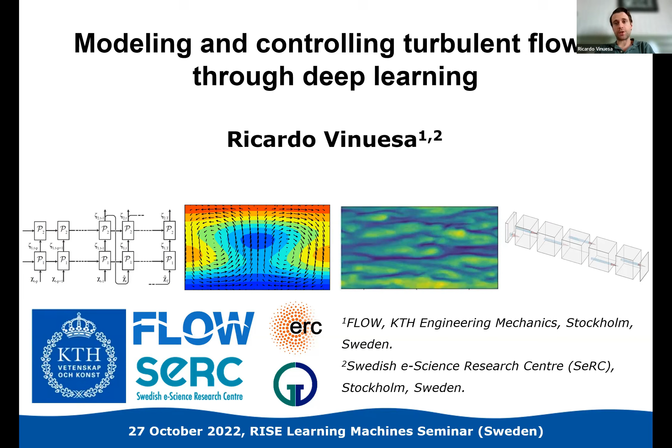Thank you very much for the kind introduction. Can you see my slides? Yes, it looks good. Perfect. And thanks again for inviting me to present in this seminar. I'm going to tell you about my work on modeling and controlling turbulent flows through deep learning. I am at the Department of Engineering Mechanics at KTH in Stockholm.

So I'd like to start. Can you see the next slide now? Yes, perfect. So I'd like to start with this introductory slide from Airbus, where we can look at a typical airliner and assess the various contributions to the total drag. Around 50% of the drag in an airplane comes from friction, which means that looking at turbulent boundary layers is a good approach to understand the total drag. Around 40% of the total comes from lift-induced drag. So that happens in finite wings, basically because of the pressure difference between the pressure and suction sides. One can actually see these wing tip vortices that have an important effect on the total drag.

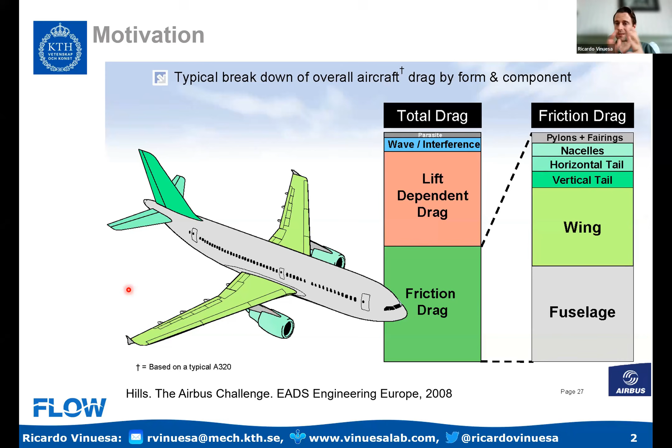So looking at turbulent wings, and in particular looking here with the laser pointer, which you can see now—so in particular, looking at wings that are finite, we can understand around 90% of the total drag in a turbulent wing, essentially.

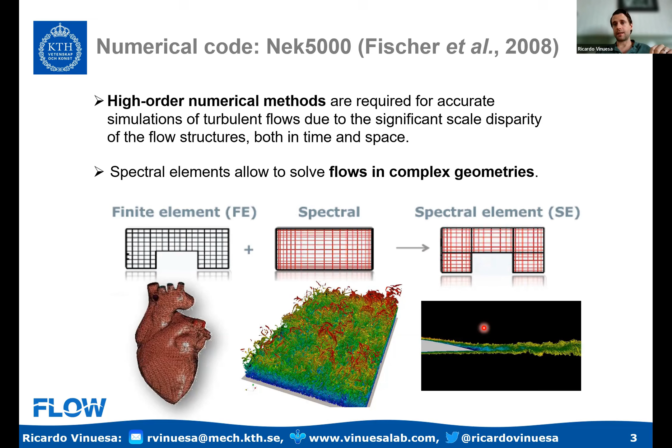Now, the way in which we use this analysis is through numerical simulations. We use the spectral element code Nek5000, developed by Fischer and others. This code combines the geometrical flexibility of finite elements and the high-order convergence of spectral methods, allowing us to simulate with very high accuracy geometries of quite some complexity. That's what you can see here at the bottom right, where I'm showing a simulation we performed some years ago. This is a turbulent wing at Reynolds number of 400,000, simulated with DNS, so all the scales are properly simulated. Now, we can generate massive amounts of data, very complete databases that help us produce better data-driven models using machine learning.

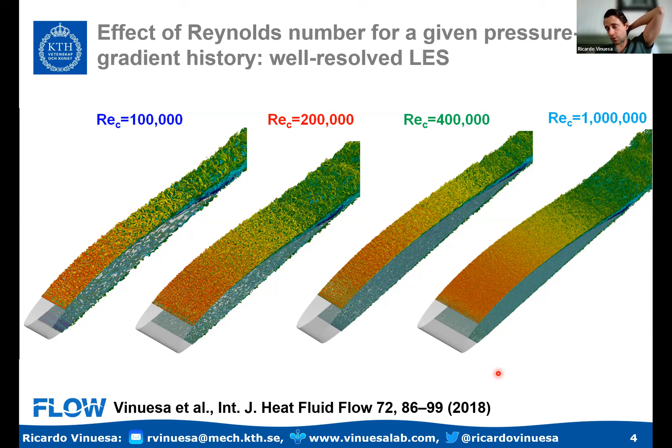So what you see here is a range of simulations in turbulent wings. This is a NACA 4412 wing section, where the first Reynolds number is 100,000, but we go all the way up to 1 million. This database can be found in this reference, Vinuesa and others, an article in the International Journal of Heat and Fluid Flow, where we share all the data on these very detailed flow simulations.

In this case, the Reynolds number is at 1 million. This is a quite high Reynolds number where the aerodynamic properties of the wing section are already relevant to those of the full-scale application. And you can actually say that even if it's a very large simulation, over 2 billion grid points on the computational mesh, we can see that we already have some limitations in terms of the geometry.

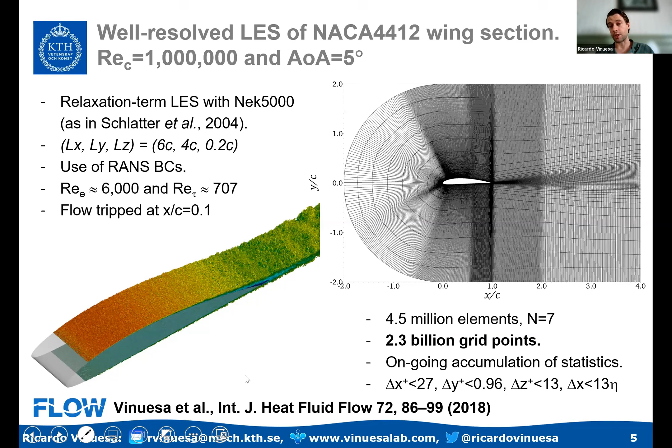So these very elongated elements lead to very high aspect ratios, which in principle preclude us from really computing very, very high Reynolds number configurations. Something that can be done is to go in the direction of adaptive meshing.

So being able to have a mesh where automatically we find refinement in the regions where we need more resolution, and due to the non-conformal meshing, we can actually have quite coarse elements close to the far field.

And this case that you see here is a finite wing with a rounded wingtip, where we can actually see the wingtip vortex rolling from the pressure to the suction side, and really this vortex is actually being tracked by the resolution that we have in the mesh.

And this very complex situation will really help us to obtain very good data and a very good representation towards understanding the contributions of the total drag in a wing.

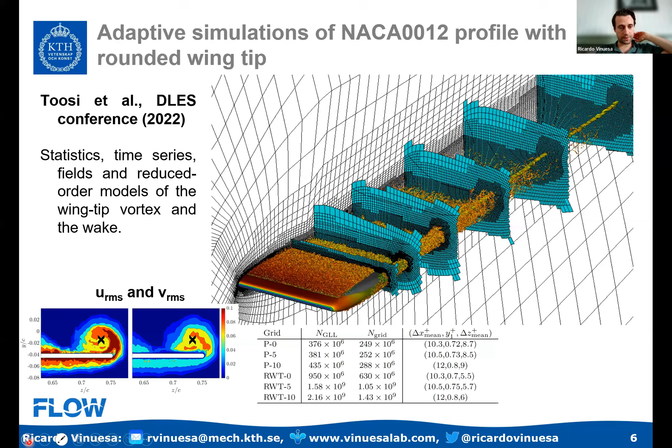So armed with all this variety of databases, I'm going to show you this video, we can actually see how it's possible to, let's make sure that it works, how it's actually possible.

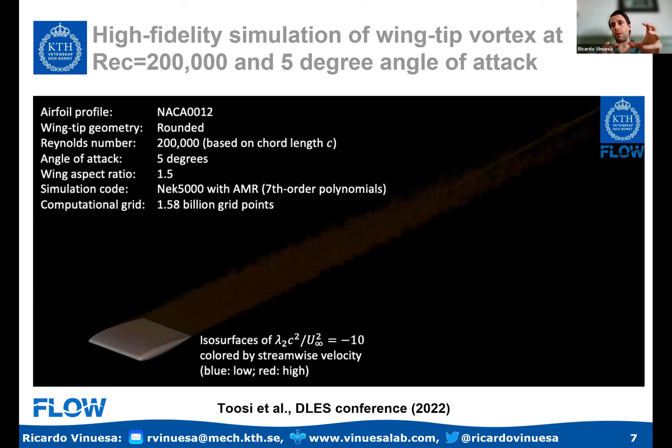So you can actually see the level of detail that we obtain in our simulations. This is a wing that is finite with a rounded wingtip. This is a simulation of 1.5 billion grid points using adaptive meshing, and I'm showing you vortical structures.

So these are basically coherent vortices which contain very high vorticity. And these are very characteristic of turbulent flows.

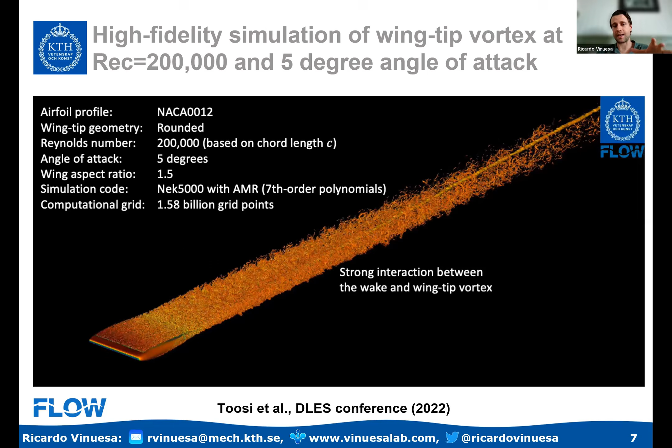Now, what I'm showing you in this visualization is the possibility of actually understanding how the wingtip vortex is rolling up from the pressure to the suction side, and the effect of this vortex on the aerodynamics of the wing.

And so what this vortex is doing is that it's basically pushing down the wake because of the rotation, and that action is producing less capacity of the wing to extract lift from the flow, and therefore it has an additional component which is the lift-induced drag.

And this is the 40% that I was mentioning at the beginning.

So basically, being able to use these very detailed flow simulations, one can actually try to understand a lot about the aerodynamics in these complex flow cases, and hopefully not only improve our understanding, but also improve our aerodynamic design.

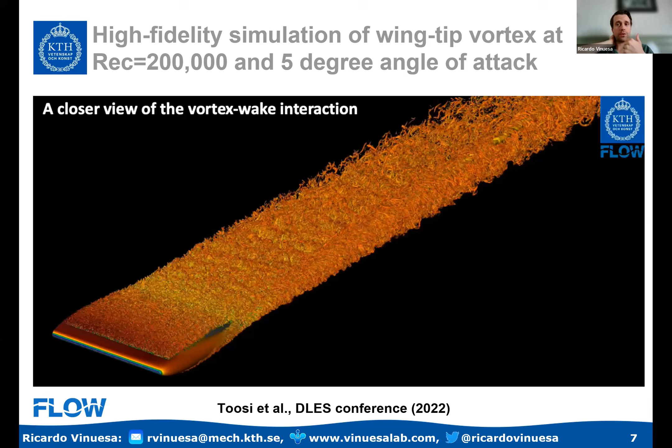This now here you can really see in a lot of detail how the wingtip vortex is rolling up from the pressure to the suction side.

You can see these vortical structures on both the suction and the pressure side boundary layers, and you can see how there is a partial relaminarization of the flow due to the span-wise pressure gradient of the wingtip vortex induced on these turbulent wings.

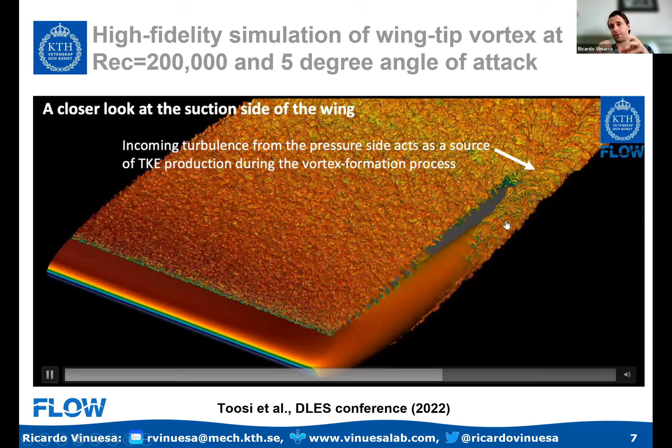And here we can see from the other angle how the wake looks like with partial relaminarization, and how the turbulence around the wingtip vortex is actually leaving quite some rotation around there.

So in particular, you can see how these very, very detailed flow simulations can be used to produce highly accurate data. And this data, we're going to be able to exploit it to develop machine learning applications.

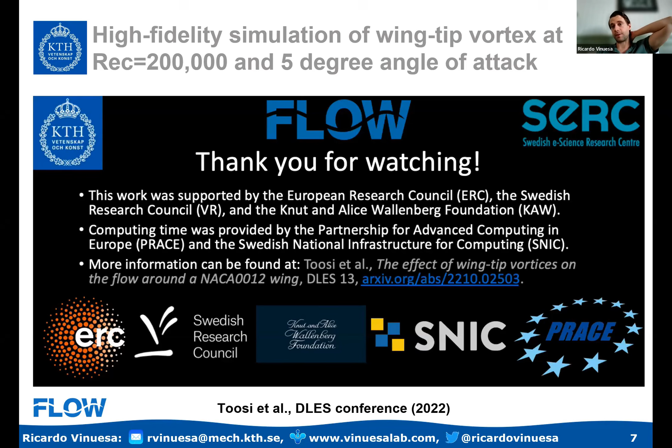This is, by the way, work by Siavash Toosi, a senior researcher in my group. He's presenting it at the DLES conference happening these days. And actually, you can see quite some possibilities of data-driven approaches with these databases.

So if we focus now more on the concrete applications of machine learning, traditionally, there has been a wide variety of machine learning applications to fluid mechanics, starting 20 years ago with the work by Petros Koumoutsakos, where he used neural networks to model the near-wall region of a channel.

More recently, there has been quite some work on subgrid scale modeling, definition of inflow and boundary conditions, flow control, RANS modeling, and even physics-informed neural networks to try to improve some of the sensing and experimental measurement in a number of configurations.

So there's quite some potential with machine learning and fluid mechanics. And in this presentation, I'm going to give you several examples of these possible areas of influence.

So we highlight that machine learning can help to accelerate direct numerical simulations. Machine learning can also help with improved modeling of RANS and LES.

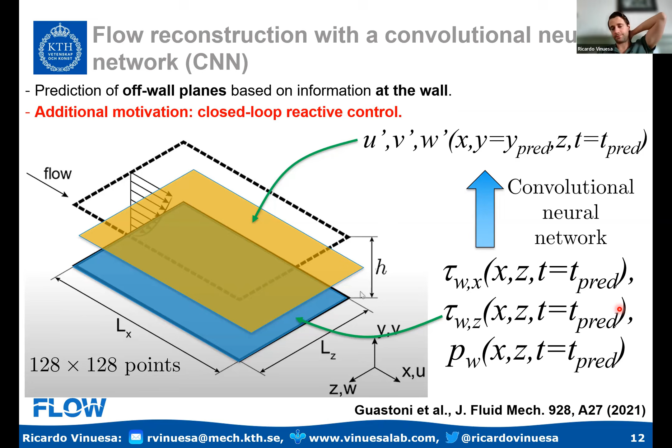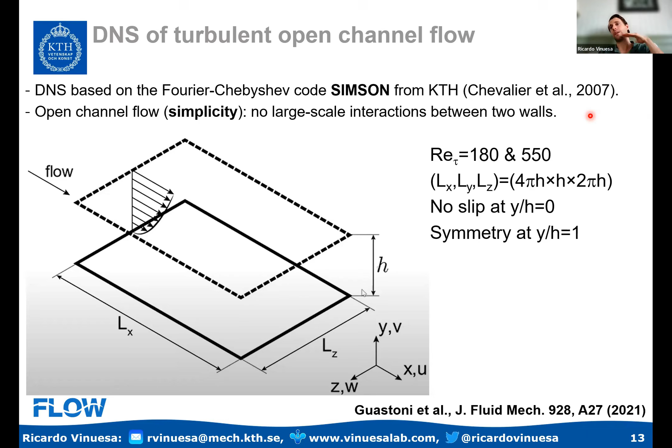So what we do is produce 2 databases. Both are direct numerical simulations, one at a friction Reynolds number of 180, another at a friction Reynolds number of 550, which starts to be already turbulent with quite some scale separation. And we're going to train neural networks to connect the wall information with the fluctuations above the wall.

Of course, this can be done in different ways. One could use fully connected neural networks, but the problem is that they don't allow us to exploit the spatial information in the data. That's why convolutional neural networks are much more convenient, because turbulent flows have a quite pronounced spatial behavior, so we can try to exploit the coherent structures in the flow through convolutional neural networks.

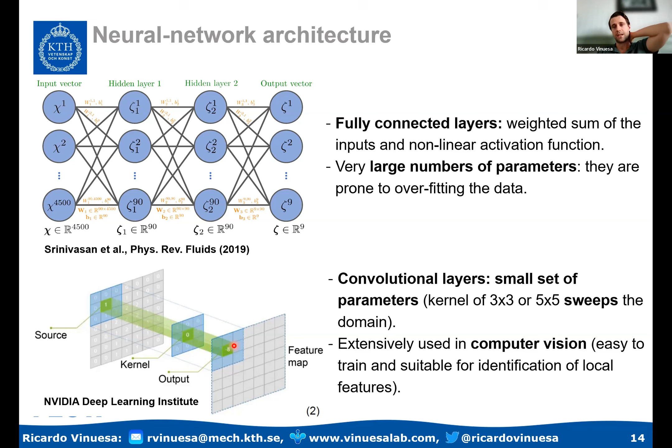In a convolutional neural network, I have this input map, basically my image. This little window is a kernel, which allows me to swipe through the input, and applying convolution operations, I can see how the data in the input is distributed in space to exploit those spatial correlations in the data. So CNNs are very widely used in computer vision for this reason.

Now here you can see one of our architectures. This is a CNN with 6 hidden layers, and you can see the number of filters that we have per layer. We have 3 inputs, which are the 2 wall shear stresses and the wall pressure, and 3 outputs, which are the 3 velocity fluctuations.

As you can see, a CNN is basically going to, in the first layers, identify less abstract and smaller features in the data, like edges or regions of recirculation. Through the concatenated application of convolutions, I am progressively building towards elements which are more abstract, so more complex, and larger. So I can hierarchically build the coherent structures in turbulence that you saw at the beginning of the video, through simpler elements identified in the first layers.

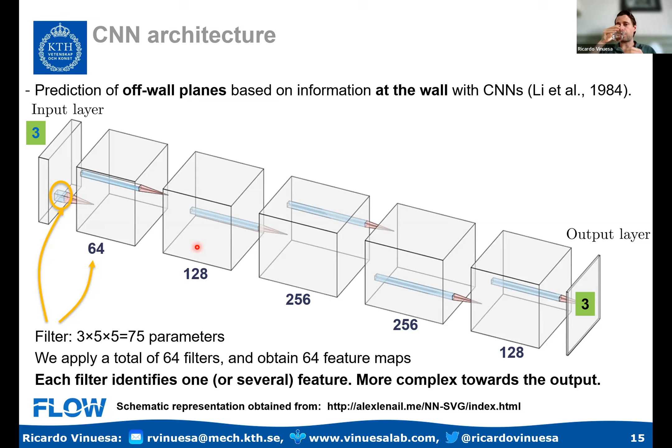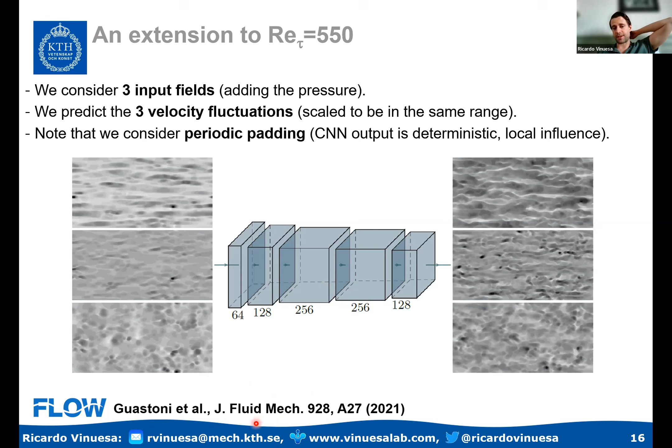So now what we have is on the left, the inputs, the wall shear stress components and the wall pressure. On the right, the outputs, which are the streamwise, wall normal, and spanwise fluctuations at a particular wall normal location. The results are at a friction Reynolds number of 550, and again, all the summary of this data can be found in JFM, in the reference you can see here at the bottom.

Now, what I showed you so far were predictions based on the full plane as an input and then the full plane as an output. So this is what we call the FCN, the fully convolutional network.

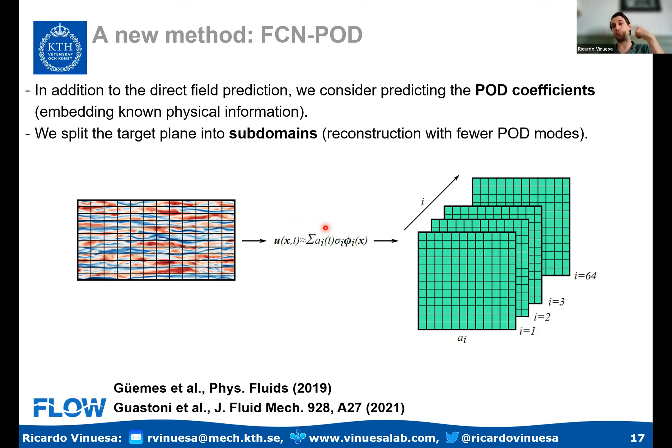But there's another method which we call FCN-POD, which combines the fully convolutional network with POD, that's proper orthogonal decomposition. This method is also known as PCA, principal component analysis, in many other areas. Essentially, this method allows us to decompose the spatio-temporal problem into spatial modes and temporal coefficients in such a way that the neural network only needs to predict the temporal coefficients. So that, in some cases, can actually be beneficial.

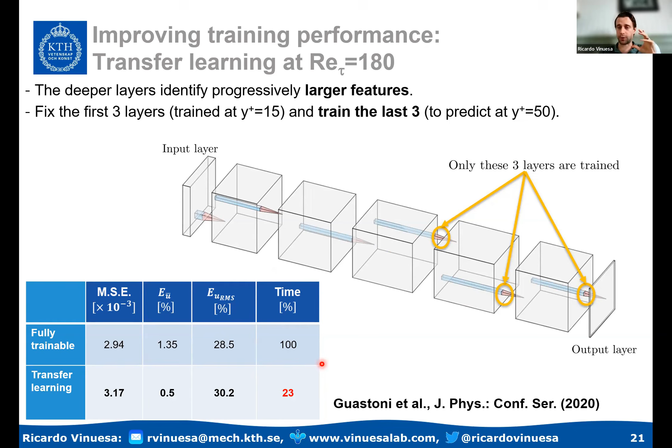So in that case, what we do is that we freeze the three first layers, because the three first layers are targeting features that are more similar and smaller, close and far away from the wall. But the three last layers, which are going to be focusing on larger features, those ones are retrained. So I only transfer the three first ones, and the three last ones are retrained. What we get is the same level of accuracy, but we reduce the training time to 23% of the original, so we reduce the training time by a factor of more than 4. Transfer learning is actually quite effective in the context of turbulent flows.

This also happens when I take a network to predict at Reynolds number 180, and I take those weights to start the training at Reynolds number 550.

So in the high Reynolds number case, I compare transferring the weights versus starting from random initialization of the network weights. What I find is that I can reduce the amount of training data by a factor of 4. That's interesting because the higher Reynolds number data is much more expensive computationally. Being able to focus most of the training on the low Reynolds number case and reducing the use of expensive data by a factor of 4 is extremely valuable. That's a quite helpful technique with transfer learning that can have many applications in turbulent flow and other engineering applications.

Ricardo? Yeah, could you please repeat the transfer? Where is it transferred from and to? This example or the previous one?

In this example, we have one network to predict at friction Reynolds number 180, that's the low Reynolds number, with all the weights. Then we take another network to predict at a higher Reynolds number, and we transfer the weights. So in the high Reynolds number case, I start the training from the weights that were transferred from the low Reynolds number case.

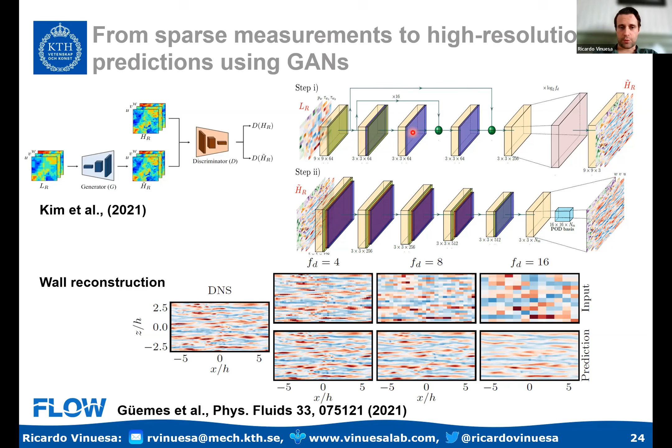Now, if we go to the next example - I showed you predictions from the wall to above the wall, but there is another possibility of predicting from far away from the wall to closer to the wall. That has the motivation of developing wall models, basically trying to replace a big part of the expensive simulation by just having a boundary condition over there. This is work published in arXiv, you can see the details over here. What we're going to do is use a convolutional neural network to predict the flow close to the wall based on flow far away from the wall. That's basically the approach we're going to take.

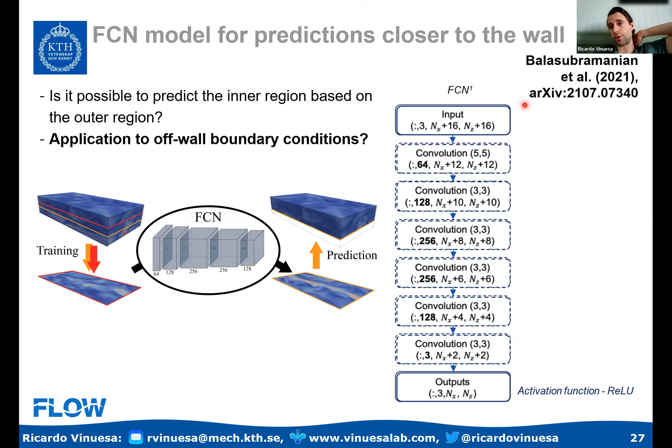Turns out that predicting from far away to closer to the wall is much harder than the previous prediction, because the wall contains all the information of the small scales. When you try to use information far away from the wall to predict closer to the wall, you're missing information about the small scales, and you also need to reorganize the way you use your receptive field to exploit the information more effectively.

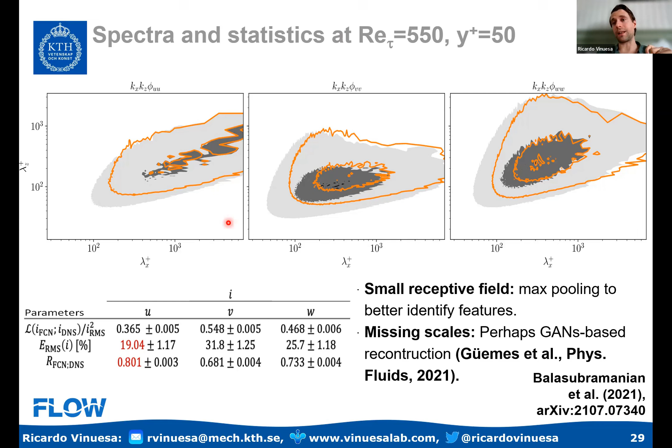In my fourth example, I'm going to talk about reduced order models. Of course, some classical reduced order model approaches can be POD or PCA. This is a linear method in which I obtain a linear superposition of modes, which by construction are orthogonal and are ranked in terms of their contribution to the reconstruction of the signal. Now, orthogonality is good because it allows me to obtain modes that are more interpretable physically.

But using nonlinear methods such as autoencoders does not ensure the production of orthogonal modes. In this study, we're going to try to use autoencoders to obtain modes that are nonlinear, but also orthogonal, and that are also ranked in terms of energy contribution. This is work by Hamid Reza Eivazi, published in Expert Systems with Applications.

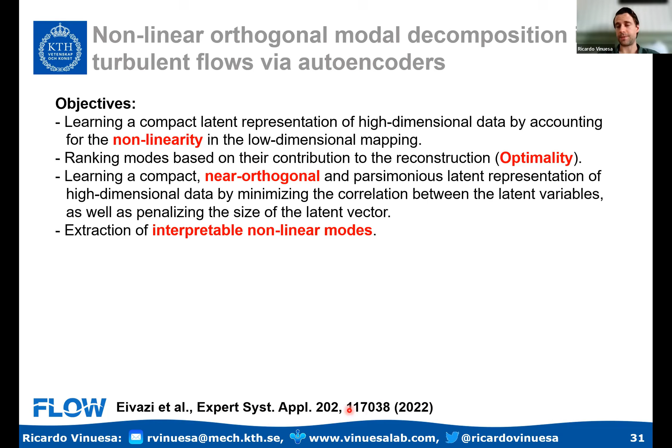So this is the reference, feel free to also check the details there. And this is the database that we will consider: a high-fidelity simulation of the turbulent flow in a simplified urban environment. You can see the level of detail we can obtain in this simulation, and we're going to predict the horizontal plane at the mid-height between the two obstacles. We have a total of 1,200 images to perform these predictions.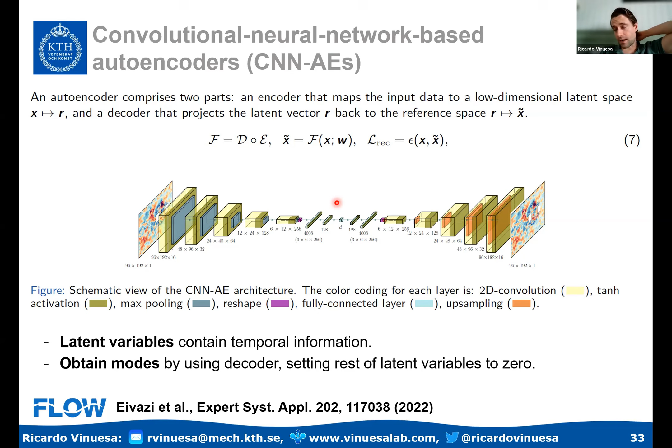Now, this convolutional autoencoder will not give me modes that are orthogonal, nor ranked in terms of their energy reconstruction contribution. The framework of hierarchical autoencoders developed by Fukami and others allows obtaining modes that are hierarchical, sorted in terms of their contribution to the energy reconstruction.

In the hierarchical autoencoder framework, I start with an autoencoder in which the size of the latent space is 1. That gives me a first latent vector R1. Then I have another latent autoencoder with a latent space of size 2. That gives me, and I fix the first latent vector obtained before, so I only obtain one more latent vector R2. If I do this sequentially, I get a number of latent vectors which have less and less contribution to the reconstruction of the original signal.

So these modes are hierarchical, but they're still not orthogonal.

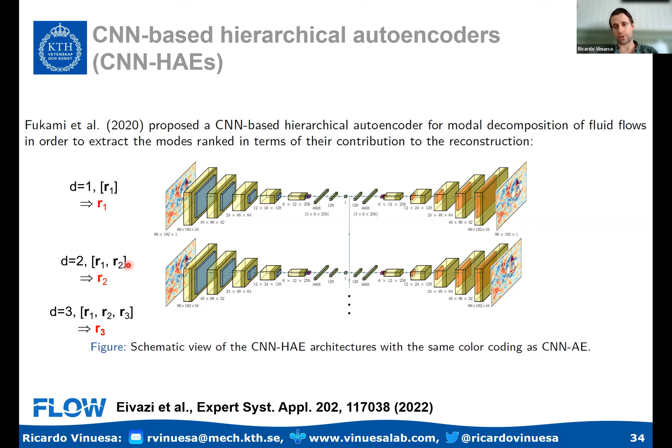If I want to have orthogonality, I can use the framework of beta variational autoencoders, which allows me to introduce stochasticity in my latent space.

P of X will be the distribution of the original data, and P of R would be the distribution of the data in the latent space. What I want to do is maximize this function, which is the marginal likelihood. This is the approximation of P of X given the parameters theta. And I have two conditional probabilities.

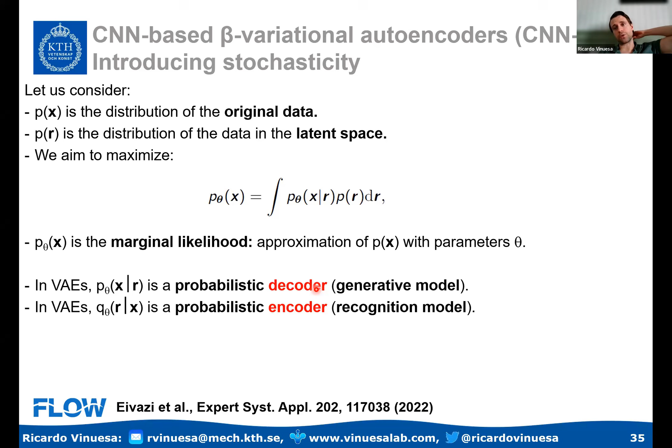In one, I have a decoder, which takes me from the latent to the original space. And in the other, I have an encoder, which takes me from the original to the latent space.

Now, the encoder is a Gaussian distribution with a mean and a standard deviation. I can sample with auxiliary noise, which is also Gaussian. And the loss function in this case looks like this: I have the reconstruction term plus an additional term with a hyperparameter, which allows me to promote learning variables that are statistically independent in the latent space.

What am I doing here? I want to have variables in the latent space which are statistically independent, and also promote learning a parsimonious model. So I want to end up having a latent space that is disentangled and also parsimonious, so that many of the variables are actually zero. This is what the setup looks like.

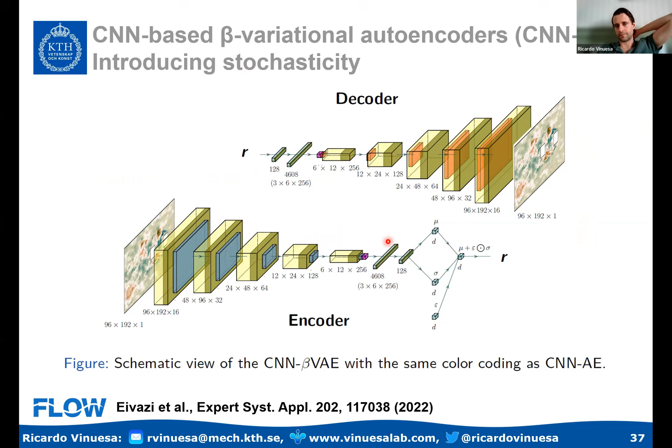My latent space, I will decode it with the decoder, and I can encode from the original to the latent space using the encoder. In the latent space, I have my mean, my standard deviation, and the noise that I use for the sampling. This is what the flow looks like.

These are the instantaneous streamwise velocity fluctuations. This is my reference. If I take POD, the proper orthogonal decomposition or principal component analysis, with 5 modes, I only reconstruct 30% of the energy. All the autoencoder-based approaches give me around 90% of the energy.

If I focus on the flow between the two obstacles, I can see all the details here. The POD is not able to identify any of these particular concentrated regions of high or low speed. All the autoencoder-based approaches are able to really identify and properly reconstruct all these regions of high and low speed and low fluctuations in the region between the two obstacles, which is quite interesting.

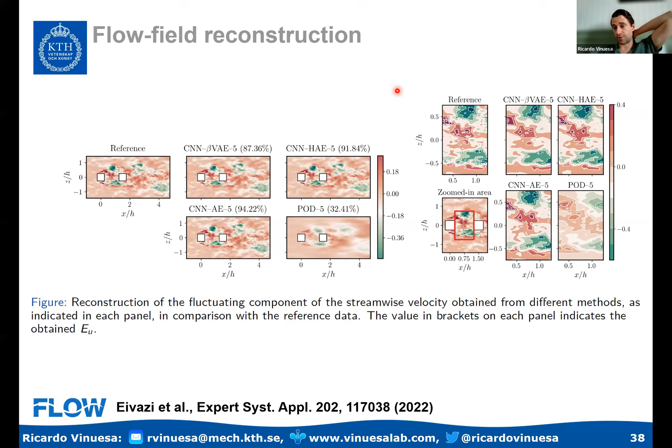This means that autoencoders allow me to have a much better way to compress data. If I want to build a reduced order model, the autoencoders are going to be a much better approach than the POD. However, are these modes orthogonal?

The POD, which is based on linear algebra, is naturally orthogonal, but the beta variational autoencoder gives me over 99% orthogonality, which is fantastic because that really allows me to have very good orthogonality in my modes. The two other approaches are not really orthogonal, as we can see from the determinant of the cross-correlation matrix, which means that they will have problems when it comes to interpreting the meaning of these modes.

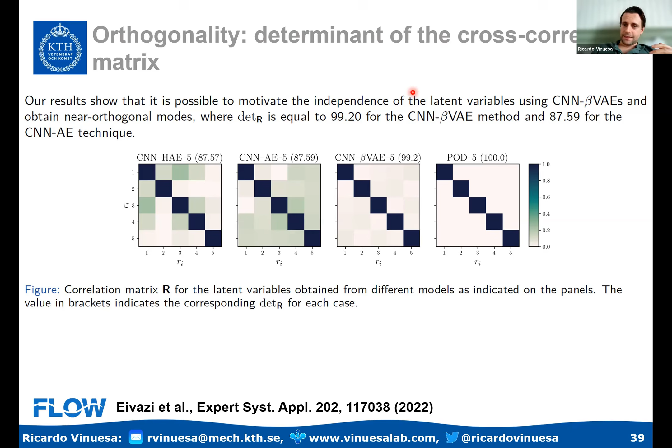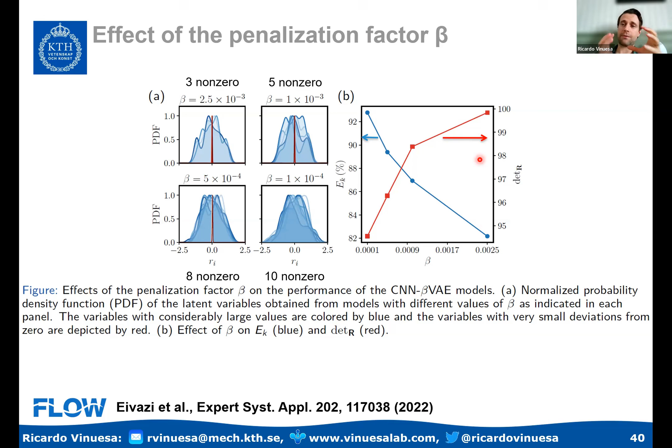Now, if I go into the effect of the penalization factor beta, what I know is that a larger value of beta will reduce the quality of the reconstruction, because my loss function has one term which is the reconstruction, and another one which is the orthogonality. But larger values of beta will give me much more orthogonality, going over 99% for the largest values of this hyperparameter. So we want to find a good balance in this beta variational autoencoder where I can have orthogonal modes and still a good reconstruction of my signal.

That's actually very cool, because this means that with variational autoencoders, with orthogonal autoencoder modes, I can obtain a quite effective representation of the original system. I can have a very good reduced order model where, with very few modes, I can reconstruct large fractions of the energy.

And that's the idea, that I can have a very compact representation of the original data. I don't need 800 modes to reconstruct 90% of the energy. I only need 5. And those modes are actually interpretable.

So I'm actually able to gain some physical insight from those modes that I can obtain. By the way, the beta variational autoencoder modes are not only orthogonal, but we can also sort them in terms of their contribution to the reconstruction. So these modes are also ranked in terms of the reconstruction contribution. The reference here is in Expert Systems with Applications. I believe this is a very promising approach for reduced order models, not only in fluid mechanics, but in a number of complex physical systems.

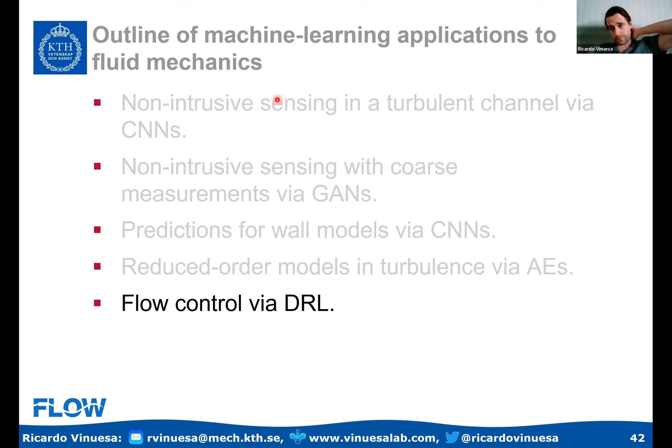Now my last example is to use deep reinforcement learning for flow control. In deep reinforcement learning, this is basically what I'm having: I have an agent, which is the neural network. This agent interacts with the environment, which is the flow simulator.

That's the environment where I'm simulating my flow, and that interaction is done through actions. These actions change the state of the environment, and that informs the agent on the new state of the environment. But also those actions will give me a certain reward, and the reward is a measure of the quality of those actions under a certain norm.

So my goal with deep reinforcement learning is to find a policy pi, which given the state of the system can provide the optimal actions to maximize the expectation of the reward. The advantage of reinforcement learning is that learning is not supervised, so I don't tell the model what it needs to learn. I just give it a reward, and the model learns by itself what it should be doing to maximize that reward.

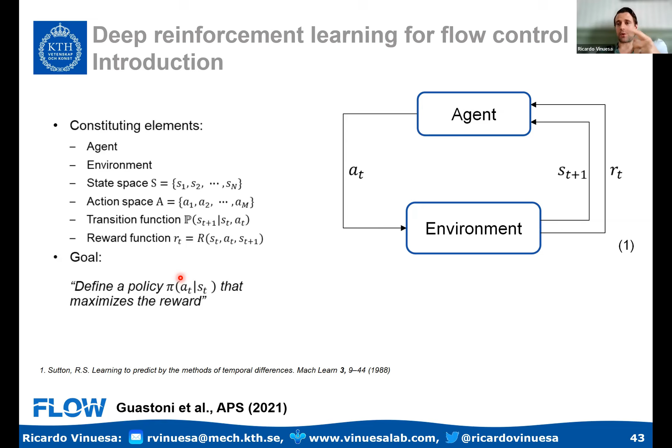We start with a simple example, which is a 2D separation bubble. What I do is actuate upstream of this bubble to reduce the separation length. This is a quite classical problem, which can be performed with periodic forcing, so I find a frequency and force the flow. But in this case, we're going to try something a bit more nuanced with reinforcement learning.

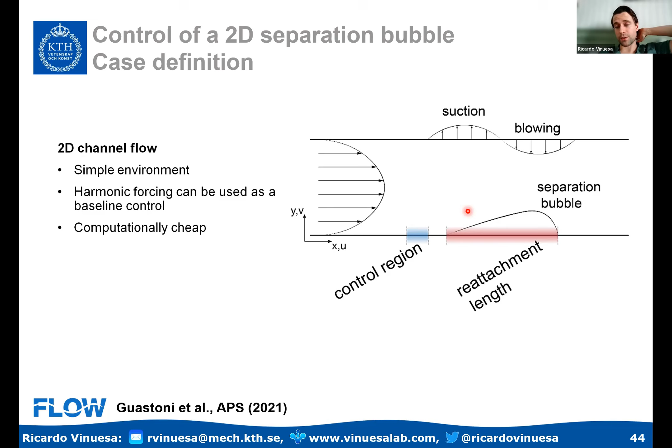So this is what the flow looks like. The colored region is the negative velocity, so basically the recirculation bubble. These dots are the probes where I'm measuring my flow. The square is the region where I'm actuating, using a volume force to set up the actuation, mimicking blowing and suction. And this arrow over here, that's the reward. I want to minimize the arrow, which means I want to minimize the separation length.

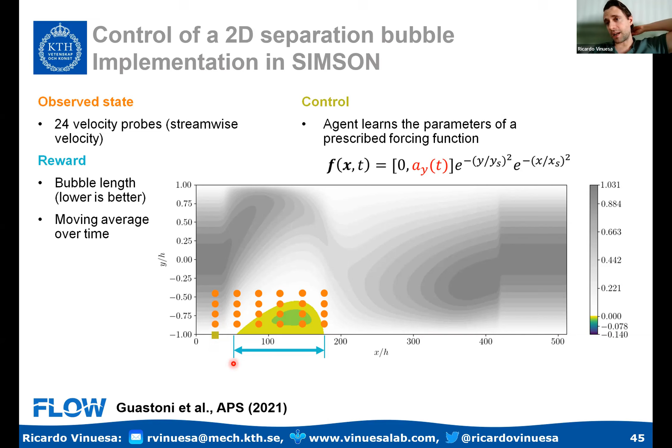Now, the key is periodic forcing means to take one frequency and force up and down. The reinforcement learning will hopefully learn something more nuanced and sophisticated, and that's something we can understand by looking at the video on the left. Looking at this video, we can see the control has at least 2 frequencies: one associated with these wave packets that I'm sending, and another associated with the length of the separation bubble.

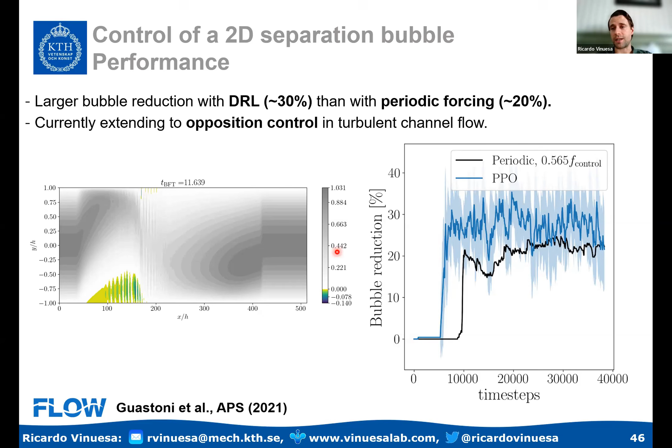So in fact, with periodic forcing, I obtain a 20% reduction in the bubble length, but with DRL, with reinforcement learning, I can obtain 30%. So the reinforcement learning is able to find a more effective strategy than the classical one to reduce the separation length. That's actually quite interesting.

These results are in a minimal channel, but they're robust when applied to a full channel. This is a very, very promising research direction, because if I can control the flow in turbulent configurations, I can have more efficient airplanes, more efficient piping through oil pipes. I can have very novel strategies to control the flow, reduce energy losses, and reduce the environmental footprint of all these applications. So reinforcement learning, I believe, is really going to help us significantly to obtain novel approaches to flow control.

And this is a summary of my presentation. I talked to you about sensing and the possibilities for sensing, also using GANs for super resolution, using autoencoders for modal decomposition, and also using deep reinforcement learning for flow control in a number of flow configurations.

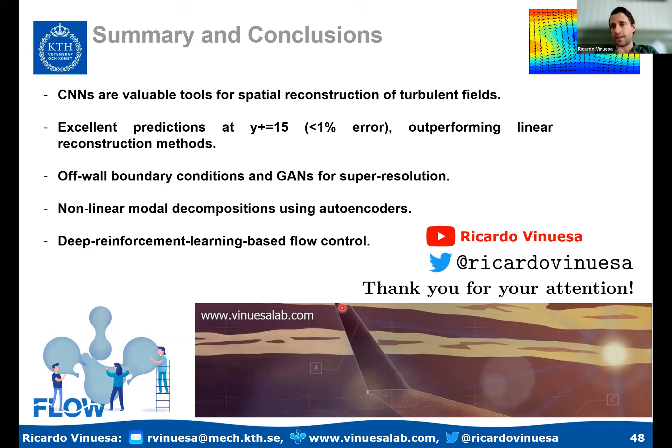So I think there are many things missing, at least. So turbulence, of course, you have fluctuations, turbulence fluctuations, because the flow is not steady. What we do, I can go back to the slide and hopefully illustrate it a bit better. I mean, what we do is that we compare with respect to the reference.

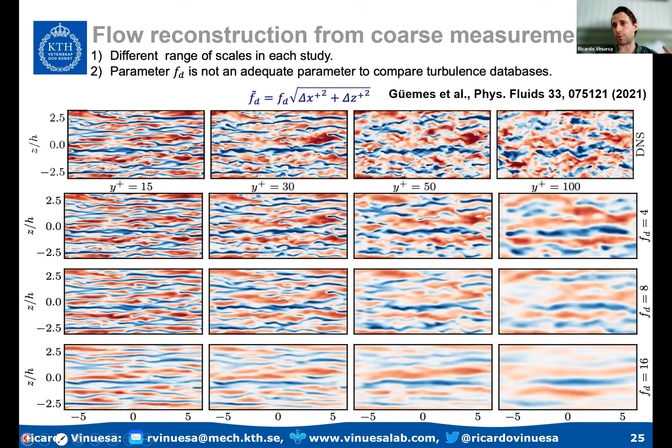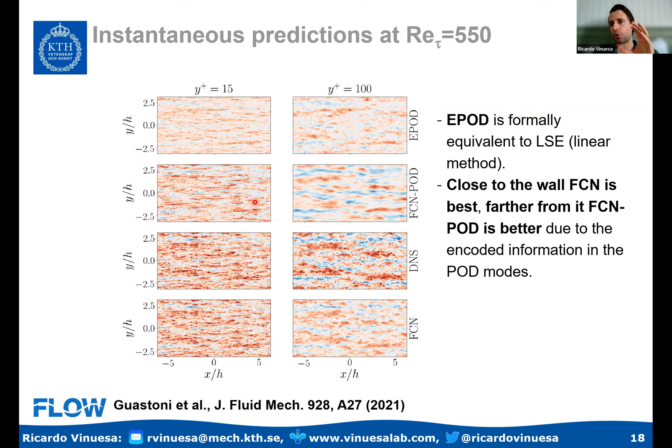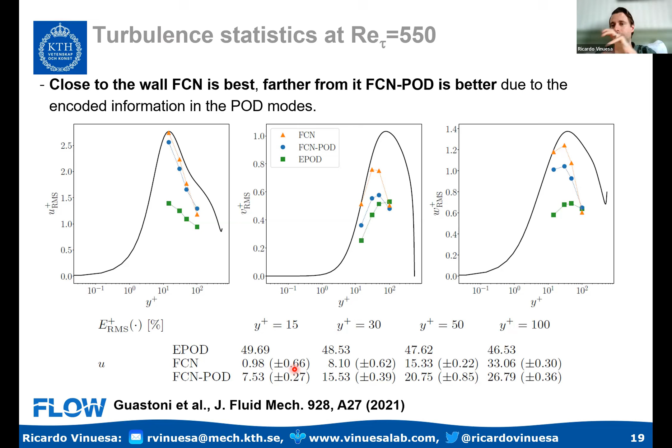Now, for the transfer learning, so this is about the predictions, taking into account the chaotic behavior of the flow and the variation of the various models that are being trained.

About transfer learning, in this example, what we do is take all the weights of the model trained for the 180 case, transfer them to the 550 case, and then keep training starting from those transferred weights. I compare the results from that model with results obtained where all the weights are initialized randomly. Of course, when transferring the weights and continuing learning from there, the accuracy is better because I've already accounted for quite a lot of the physics behavior from the previous low Reynolds number case.

Keep in mind that the same network can be applied for both Reynolds numbers because the size of the kernel is the same. The images are bigger at high Reynolds numbers, but the kernel size is the same in both cases.

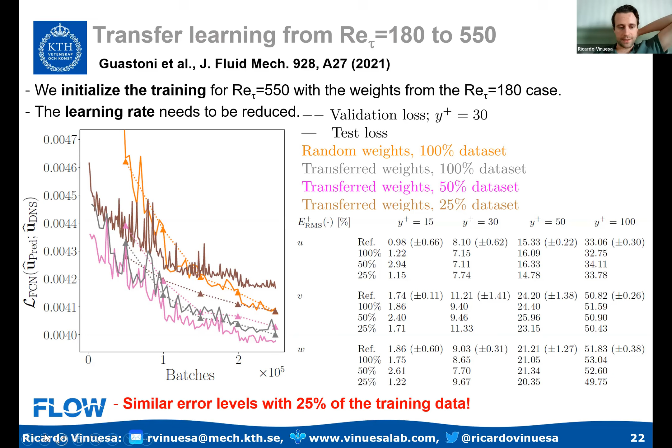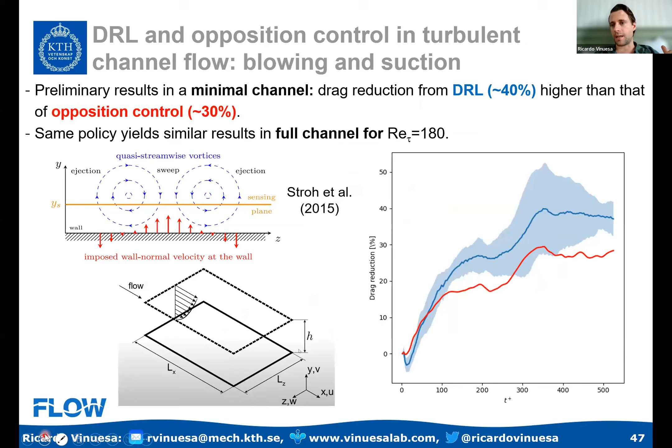I actually have some work on physics-informed neural networks for PDEs, I can show some slides quickly. I think that physics-informed neural networks will never replace CFD. Never - that's my personal opinion. These numerical methods are designed to effectively solve the PDEs. Neural networks cannot compete with numerical methods in this sense. So to think that PINNs or other neural network approaches will replace CFD is quite naive. I don't think it will happen.

However, in some applications, PINNs can be better than CFD in concrete cases. I have this paper also by Hamid Reza Eivazi, referenced in Physics of Fluids. What we do is take the 2D RANS equations and we don't assume any model for the Reynolds stresses, we just solve the 2D RANS equations with PINNs.

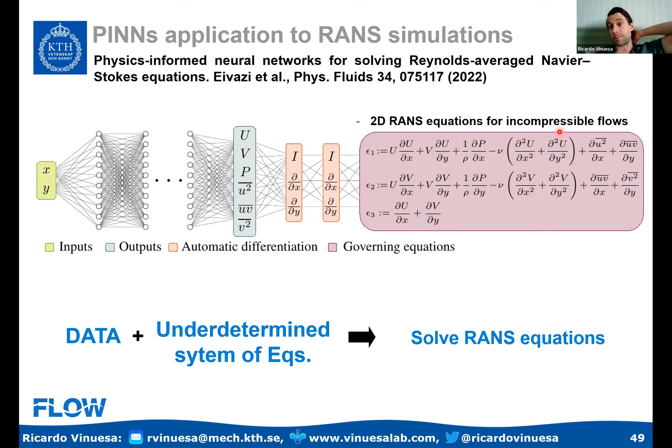What happens with PINNs is that because of automatic differentiation, we have exact derivatives, which means I don't need to resolve all the gradients with very high accuracy. This lets me get away with a mesh that's coarser than an industrial simulation, so I get a cost similar to an industrial simulation but much better accuracy, because I don't need a model for the Reynolds stresses - they're solved within the PINNs approach as part of the same PDEs.

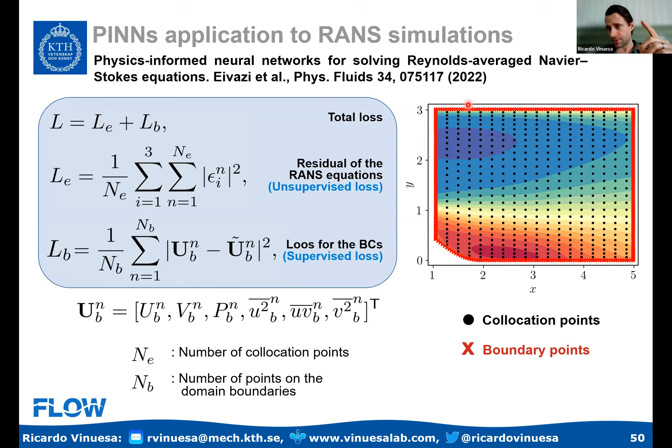So in this particular example of solving the RANS equations, PINNs can outperform traditional CFD solvers, but in general I don't think there's any chance that will happen broadly. I can show you, I get very good results - even in the periodic hill example, PINNs achieves less than 3% error in the mean, with very good representations of Reynolds stresses, but again, for very niche applications. Thank you.

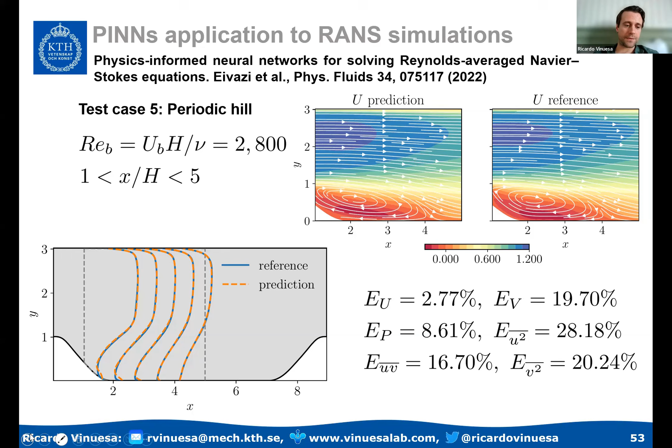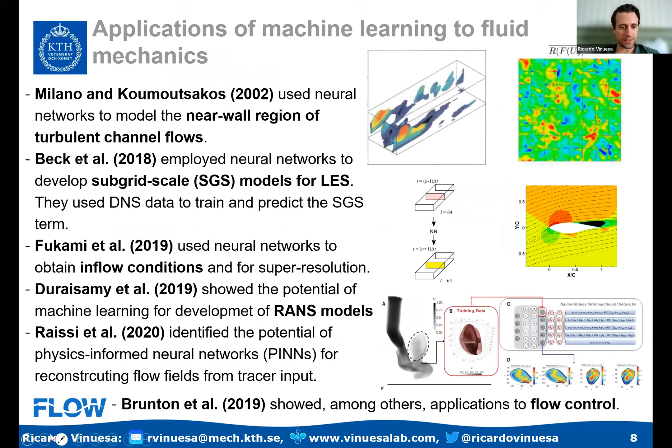Yes. I would suggest the review paper that I have in Nature Computational Science can be a good place, because I try to provide a good overview of the existing methods and possible future directions. This is the reference, published this year. Here I highlight where machine learning can help for modeling, both RANS and LES modeling, reduced order modeling, and acceleration of DNS. This can be a good starting point.

I see opportunities in all these areas, machine learning can really help flow simulations in all of them. In some cases you can find better closures, in some cases you can get a reinforcement learning algorithm to devise new ways of closures, find coefficients. There are many different alternatives, but I suggest you have a look at this paper, and of course I'm happy to talk to you, have a call, and discuss in more detail possible ideas for collaboration.

Thank you, so if you want to quickly... Yeah, I can quickly address it. I think there is some interest, so I'm happy to answer: the question was whether I share my data or code.

So all the papers that I have shown, the data is available and the codes are available. If you cannot find it, please contact me, and I will be very happy to provide the papers, the codes, and the data. I really have everything open access, everything is reproducible. Several groups have been able to reproduce exactly the same results, so in principle I'm happy to share everything and also interact and discuss more.